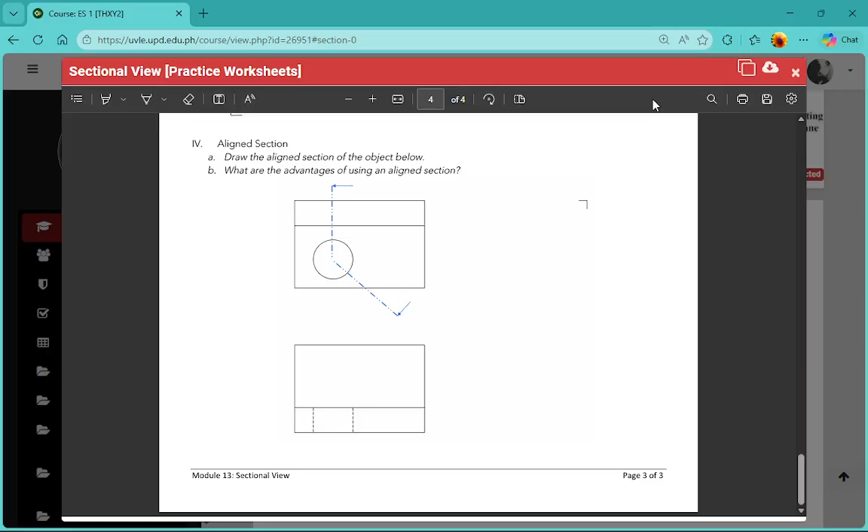Alright, so this is the last lesson for ES1. We'll be doing aligned sections and you can find the plate for today or the practice worksheet for today dito sa plate 17. Ito actually yung ginamit natin last week, no? It's page 4 yung gagamitin natin of the practice worksheet. I'll be adding one more kasi since we have 3 hours to do this and kaya naman natin in just siguro 30 minutes or 30 to 1 hour, no? So we'll do this simple one first, tapos dagdag tayo ng isang much more complicated na object. And we'll do those two. We'll probably end earlier today and the rest of the session gawin natin consultation session na lang for the object that you want to pursue dun sa final project nyo.

Okay? So, let's start. Again, download the file. Tapos, gawin natin. Double check ko lang. Nagre-record ba? Okay, record naman.

Tapos, again, hindi tayo mag-PDF import, no? Kasi pag PDF import, hindi kasi siya gawa through AutoCAD. So, hindi siya nag-appear properly. So, we'll do attach. Ito yung gagamitin natin. So, let's go to the insert tab. So, from home, insert. Then, you do attach. And find the file. I'll select this one, sectional view. And okay lang. Nag-lag konti yung device ko.

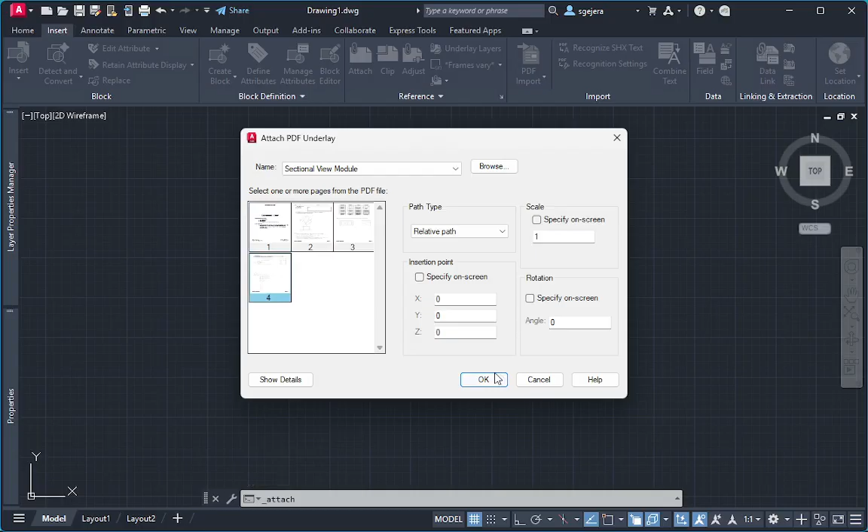Okay. Ang gagawin natin is I'll choose page 4 and I'll just specify 0, 0. Then zoom, extents. And from what we've learned before, need natin siyang i-scale up, no? So, probably the easiest way is to scale up the entire thing para sakto siya, yung units niya is yung exact dimensions of the A4 size. So, I'll just double check units through UN and naka-millimeter naman ako.

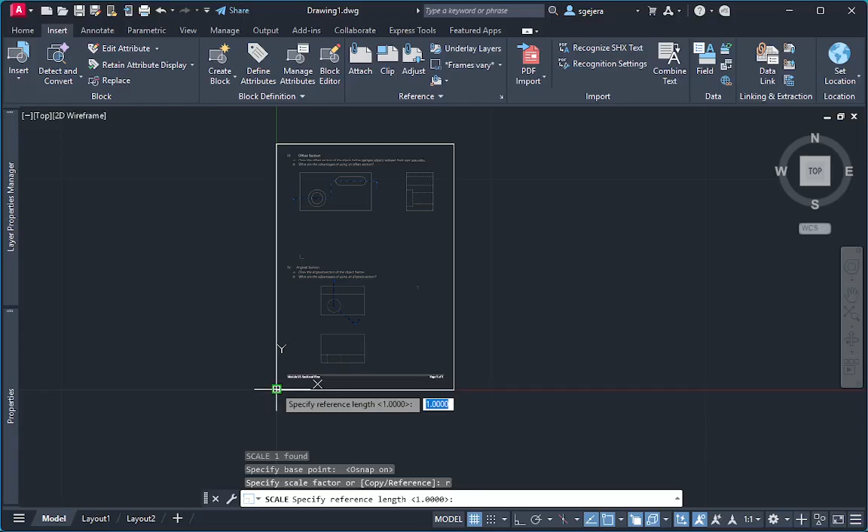So, since I'm doing millimeters, pwede kong gawin is I'll select this page. I'll do SC for scale. Then, select a base point which is the lower left. Ito, that's our base point. Then, instead of writing a scale factor, again, reference yung gagawin natin. So, we do R for reference. Select the bottom line, the reference line. Now, we can adjust this to the new dimension. Which is, kung A4 siya in millimeters, it's 210 by 297 yata. Basta ang alam ko ang width ng isang A4 is 210. So pwede kong i-adjust para maging 210 siya.

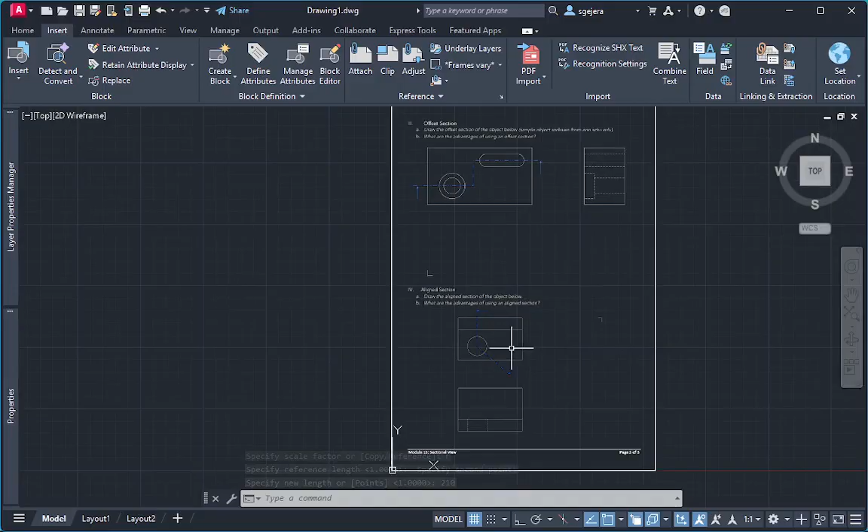So what happens is ito exact size na. So this is now scaled correctly, no? So if I just measure kunwari ito, let me just measure this one. It's around 35 which makes a lot of sense. Parang 35 millimeters ito. And just double checking ito, this should be 210. Tapos yung height niya should be 297. Tama, 297. So that's a quick way to scale up, no?

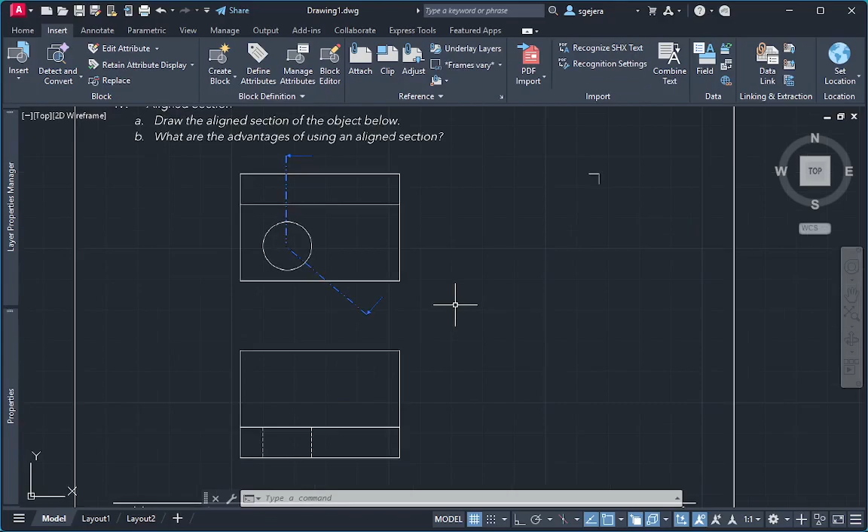But again, since infinitely scaling naman, kung hindi naman particularly interested tayo sa correct dimensions, pwede naman na hindi na natin i-scale up. Pero scaling it up just makes it easier para pag insert dimensions tayo or create tayo ng hidden lines, etc., hindi na natin kailangan i-mess around yung scale factor, kasi it's scaled correctly in the proper view, no? Okay?

So, eto, gagawin natin is an aligned section, and hindi masyadong kita sa projector, pero the aligned section is this one right here, and I'll just recreate the aligned section para mas makita nyo on screen. I'll just create a line from here to here. Yan. So, nag-create lang ako ng line on top of the blue line kasi naka-blue line siya dito. So, this is our aligned section.

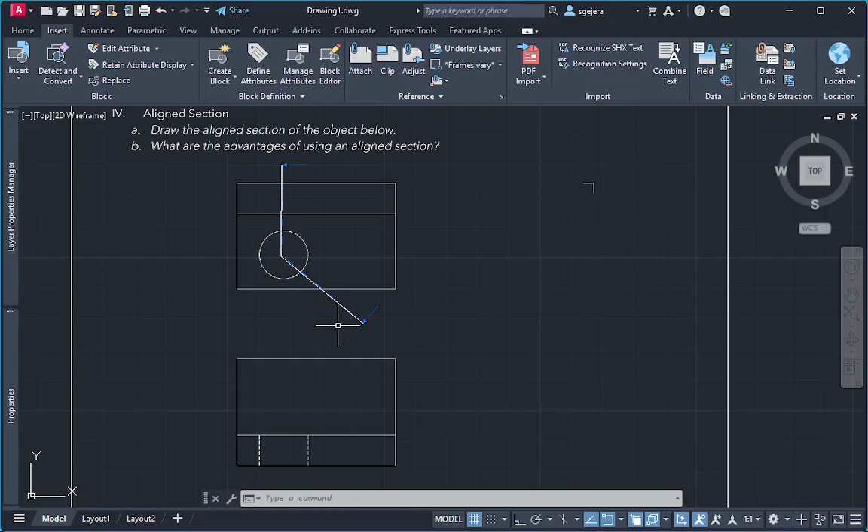So, the aligned section is, again, a sectional view wherein one of the sections is not parallel to the other portion. So for example, this is the first section. This is perpendicular to the fold line, pero itong section na to is not perpendicular to the fold line, no? It's at an angle. Okay? Now, again, from our lesson last week, kung meron tayong aligned section, hindi natin pwede siyang directly i-project lang along the normal. Like, for example, hindi pwedeng orthogonal lang siya or perpendicular siya dito sa folding line na to.

Okay? Wait lang, parang nawala yung keyboard. Sorry.

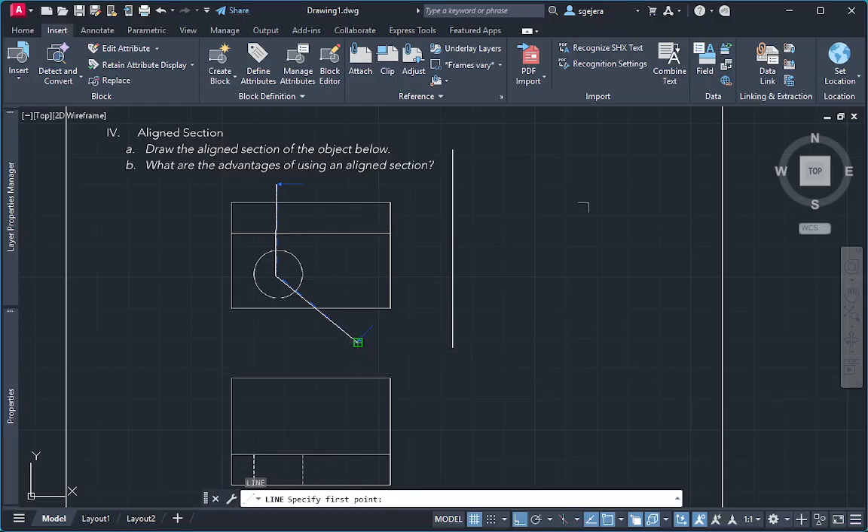Hindi pwedeng gumawa lang tayo ng line here and ganyan, tapos i-project lang natin lahat ng lines na to perpendicular to this fold line, because what happens is dito sa portion na to where there is yung aligned section natin, yung section kung saan nag-bend siya, hindi na siya kumbaga nagpapakita ng true dimensions, no? So it is shown in a shortened view na, kasi distances will be closer once projected into this portion right here.

So before we can do that, kailangan natin siyang i-rectify, no, such that gagawin natin is we will create a sort of rectified na length dito. Tapos after rectifying it, tsaka natin siya pwedeng i-project. And later on ipapakita ko sa inyo yun, no?

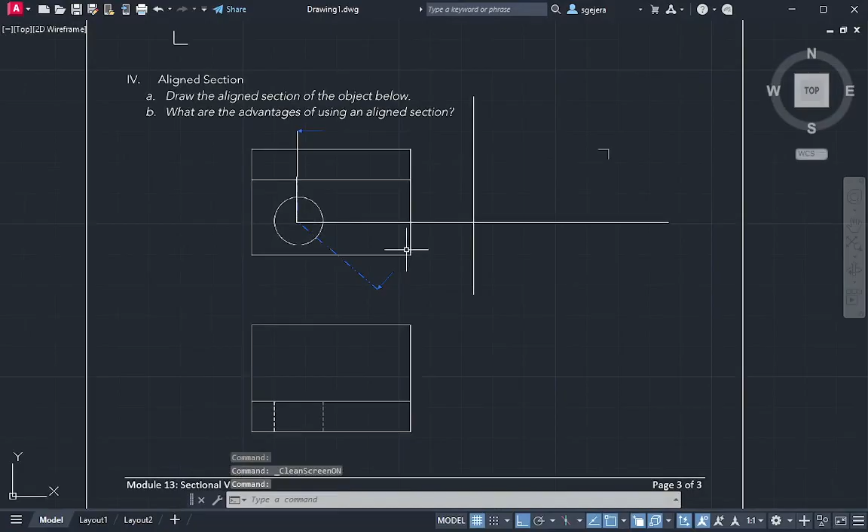So at the start, gawin lang muna natin, and I'll just delete this first, no? Gawin lang muna natin is let's try to create the portion wherein parang full section lang siya, no, or straight lang yung section natin. Then afterwards, i-create natin ito.

Okay? This object right here, pagka tinignan natin, it's a simple object, no? If you look at it from the top view, parang may dalawang rectangles tayong nakikita. Isang rectangle sa taas, itong rectangle na to, tapos isang rectangle sa baba. Okay? Tapos dito naman, baliktad yung rectangles, no? Yung large rectangle is nasa taas, tapos ito namang bottom or yung smaller rectangle is nandito sa bottom, no?

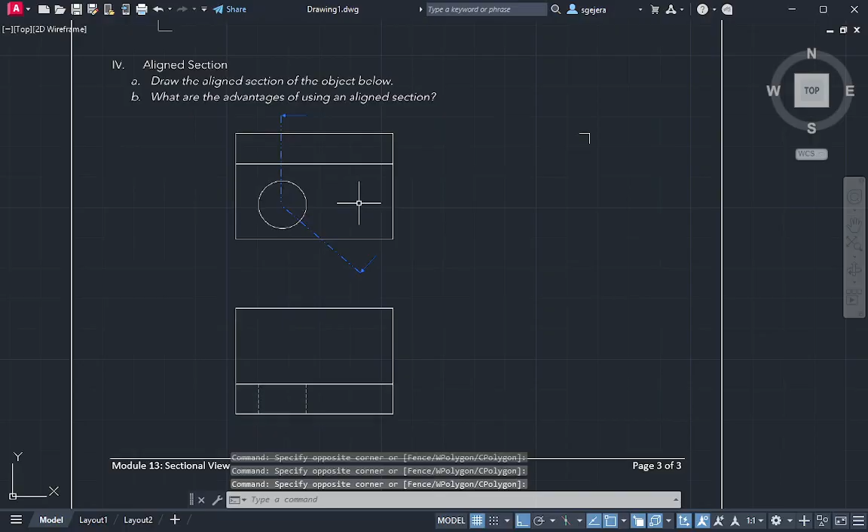Which means that this shape is probably para siyang L shape, no? Tama, para siyang may vertical wall na nakatayo, tapos meron kang platform na nakahiga sa ground. Tama? So that's the most likely configuration. Tapos dito sa platform na nakahiga sa ground, yun yung may butas na circle, which is signified by this one, no? Itong hidden lines dito.

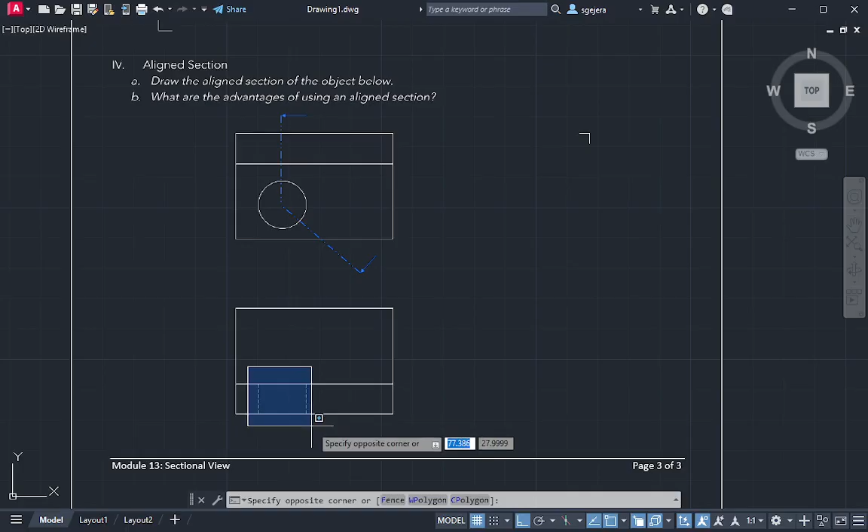Okay? So this can be easily done. Try lang muna natin, project lang muna natin from this point, and let me just change my layers now. I'll add a new layer. I'll just say answer. I'll make this yellow. So we project again, hindi nagwo-work yung snapping dito because this is a raster image, no? Let me just double click para select the correct layer.

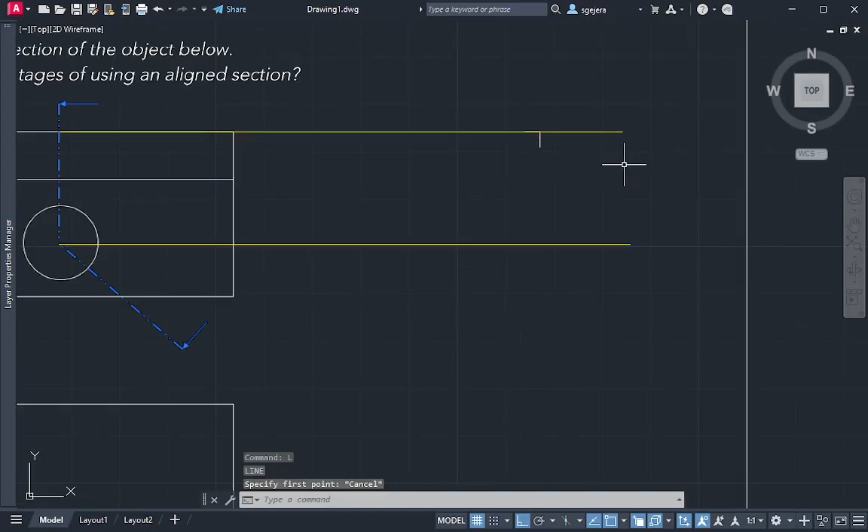And I'll just begin to create my projection lines. From here. Ito, I'm just estimating kung nasaan yung center, no? Although, given naman yung center, which is this one, hindi ko alam kung litaw siya sa projector. Pero you can zoom in para mas makita nyo. And let's just start from this portion, no? Ito lang muna. And we have itong starting point natin, no?

Or yung markers natin, so we can create something that looks like this, and I can probably just trim this para mas malinis. Okay, tapos gawin natin is copy lang natin muna yung height ng object para alam natin kung saan siya mag-end. So this is this height right here, copy lang natin, and let's just create a perpendicular line like so. Okay, so ito yung sort of glass box natin for the upper side ng aligned section natin.

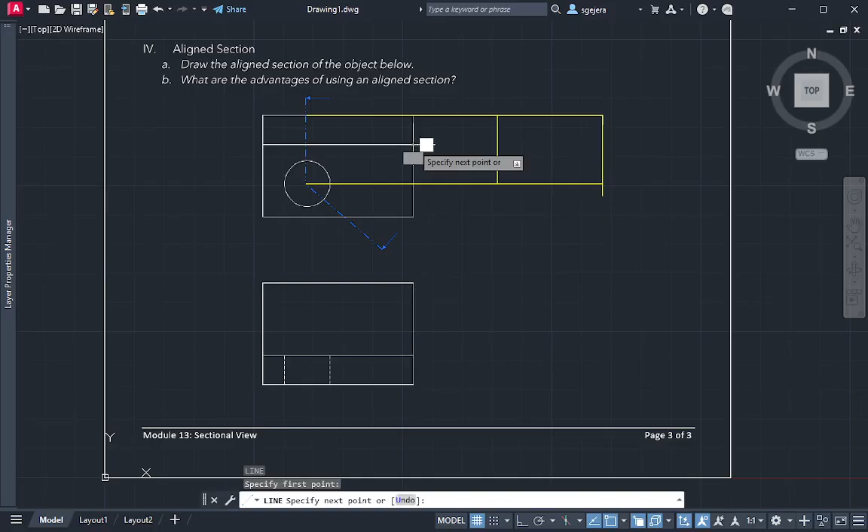Alright, so let's try to complete this. Gawin natin is let's do the wall first, no? Yung parang nakatayo na portion. So that portion is just signified by this one, no? Parang ito lang siya. If I created a perpendicular line from here to here, then this should be, kumbaga, the side view of that wall, no? Right? So it's as easy as that.

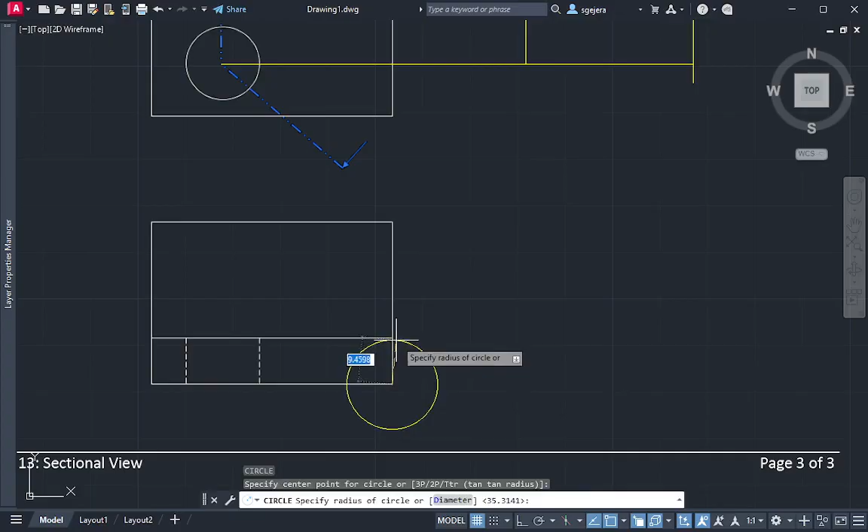Tapos dito naman sa baba, which is yung thickness ng platform natin na nakahiga sa ground, is just this one, no? So pwede natin kopyahin yung distance na to, lipat lang natin dito. And I can create something like this. Now, I'll just trim this down. Ito, pwede siguro i-trim ko na din to. And this one, ito yung L shape na nakikita natin.

So, it cuts across the section or the solid itself. So, pwede natin siyang ma-create itong L shape na to. And just by looking at it, we know na pwede natin i-trim tong sides na to because this is an entire solid, no? Ito, itong buong to. From the wall up to the platform, isang buong solid yan.

Okay? Now, from this portion, meron kasi siyang butas. So, we know na magkakaroon siya ng discontinuity dun sa hatch lines na i-create natin, no? Or yung solid portion. So, we can create a line projecting onto the sectional view. Tapos we can trim it down. Tapos itong line na to, this is where the solid section ends, no?

So ito yung solid. Tapos pagdating dito, this is now the back half of the, if you're looking at it from the right side view, ito yung back nung hole or ng cylinder dun sa likod. Tama? Which is shown as just a plane, no? Okay? So it's as easy as that. Madali lang natin na-create yung first na section, no? It's just an L shape na merong portion kung saan hindi siya naka-hatch. Okay? So, ang pwede natin gawin is we create our polyline.

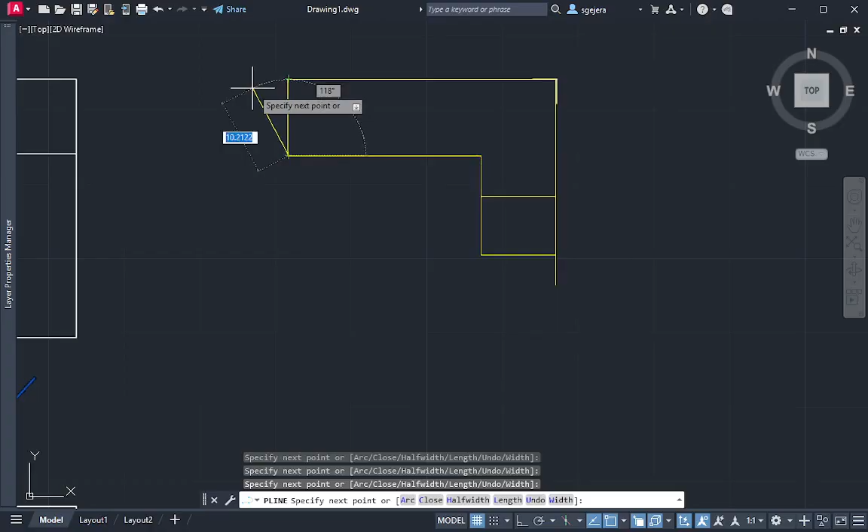Tapos create ko lang. And again, I'm using polylines because it's easy to hatch kapag naka-polyline sila, no? Instead of defining another region. Okay? So, this is our polyline. Ito siya. And let's use the hatch tool again. We press H for hatch. And lalabas itong menu na to.

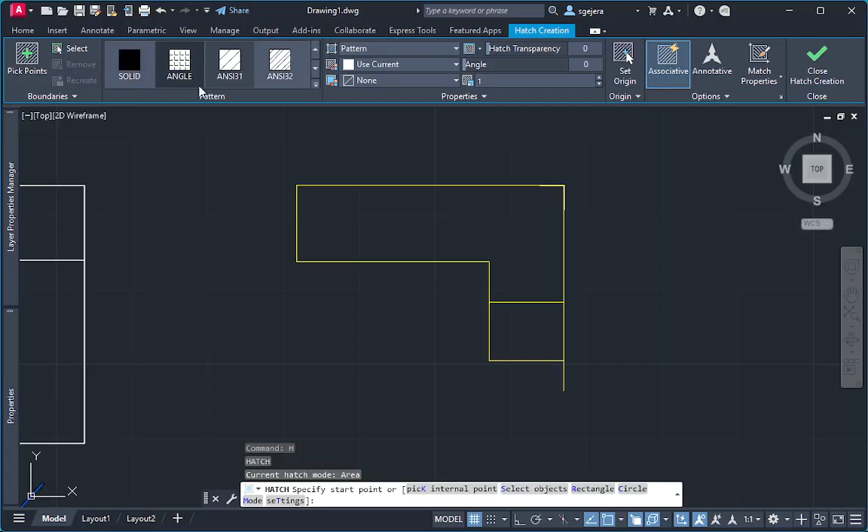And I just realized, kaya pala lumalabas siya sa akin na ganito because I'm in immersive mode, wherein hindi naka-ribbon siya. Pero sa case nyo is naka-on yung ribbon nyo. If you press H, actually lilitaw siya dito sa ribbon portion. So, probably na-notice nyo din naman yon. And the options are actually nandito sa top ribbon. Automatically lilitaw siya. Pwede kayong pumili ng ANSI, etc. But if you're like me and you like working in immersive mode, na naka-off yung ribbon, if you press H, ang lalabas is a dialog box.

Okay, so let's select ANSI 31. It's the general purpose na pattern. Tapos, we select our object, which is the polyline that we've just created. Press enter. Tapos, I think okay na yung default settings dito. If we press OK, it should hatch perfectly.

So, notice how dahil ang ginawa natin is we scaled the PDF up, hindi na natin kailangan na baguhin pa yung scaling ng hatch lines. Okay na siya. So, that's one advantage of scaling your PDFs first before even beginning your drafting. Okay? So ito, I think this is okay na. Nagawa na natin yung first half.

So, siguro stop muna ako dito. Check ko muna yung work ng nandito sa face-to-face. Right. So, if you're having trouble, pero yung iba magsisimula pa lang yata kasi may clock error ba? Raise your hand kung may clock error. Madali pa lang naman to, so don't worry, mabilis na lang makakot to.

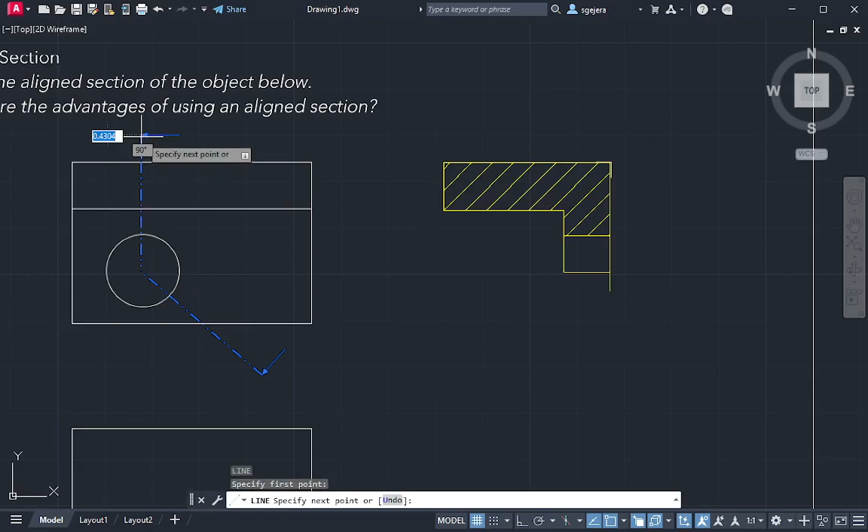Okay? So, itong portion na to is, again, madali lang siya. So, itong mahirap is actually the aligned portion. This one. Because ang goal natin is kailangan natin siya ma-rectify, and I'll just draw it again para mas malinaw. So, the problem is that kailangan natin i-rectify muna ito such that it's now sitting parallel to the first line na ginawa natin. So, dapat ganyan siya.

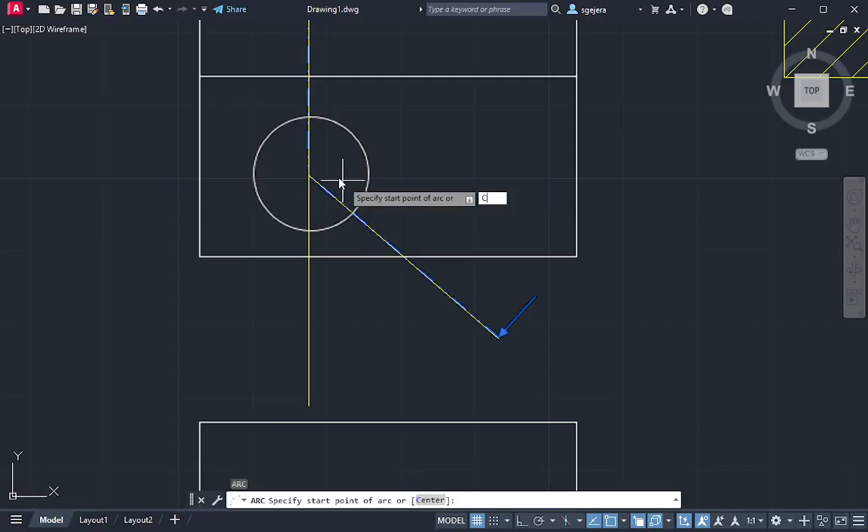So, what we need to do is measure all the dimensions na tinatamaan itong section na to, and create tayo ng arc such that papasok siya dito sa new section. So, create tayo ng arc, place the center here, tapos from this point, i-create natin yung arc papunta dito sa line na to. Ito portion na to, most likely dito siya mag-end, because this is a circle, so yung arc niya, if we were to rectify it, papunta lang din siya dito.

Tapos, ang next niya na feature would be this one. Tama? So, ang natatamaan ng mga features nitong aligned section natin is this is the first feature. Second feature would be this one. So, 2 features lang actually siya. So, we first do arc, the center from here. Tapos, create tayo ng ganyan. Kung saan siya tumama, yan yung location niya along the rectified na section.

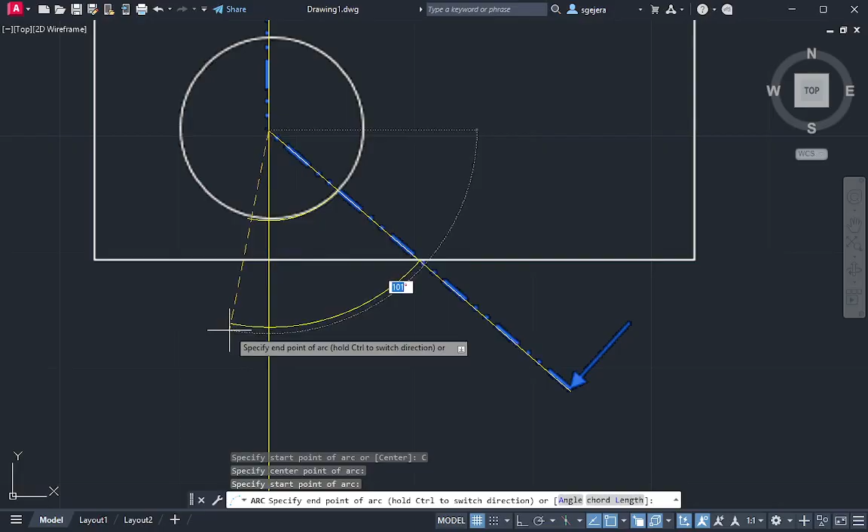So, if I create another arc from here, this portion right here, gusto ko siyang patama dito. Okay? So, this is now the new dimensions or the new distances na ipo-project natin onto this line. So, let's just extend this line like so. Tapos, extend lang natin siya from here to here. Kasi ito din naman, extend lang natin ng ganyan. So now, eto na yung continuation ng aligned section natin.

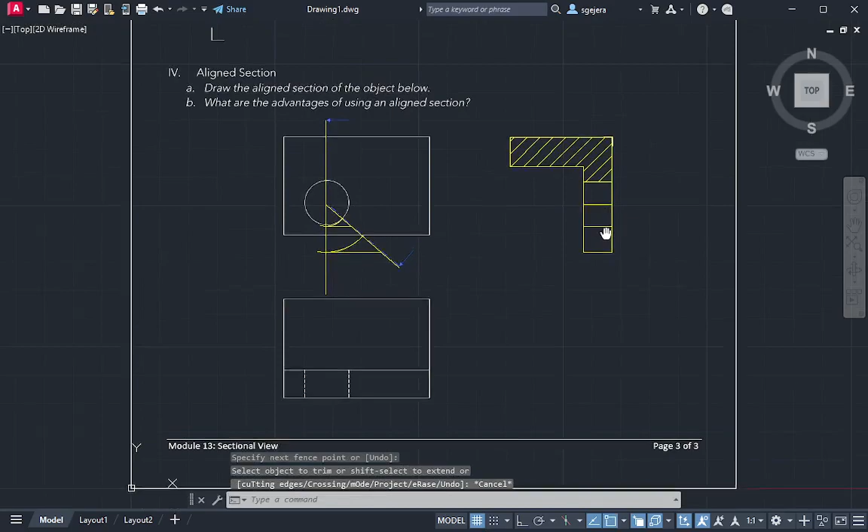So what we can do is extend this line like so. We can trim it, and we can trim this one as well. Alam ko na this portion right here is a solid na section. Naka-hatch siya kasi it corresponds to this one. Tama? So, this portion corresponds to itong intersection na to. Tapos, itong portion from here to here corresponds to the hole. So, ibig sabihin, from here to here.

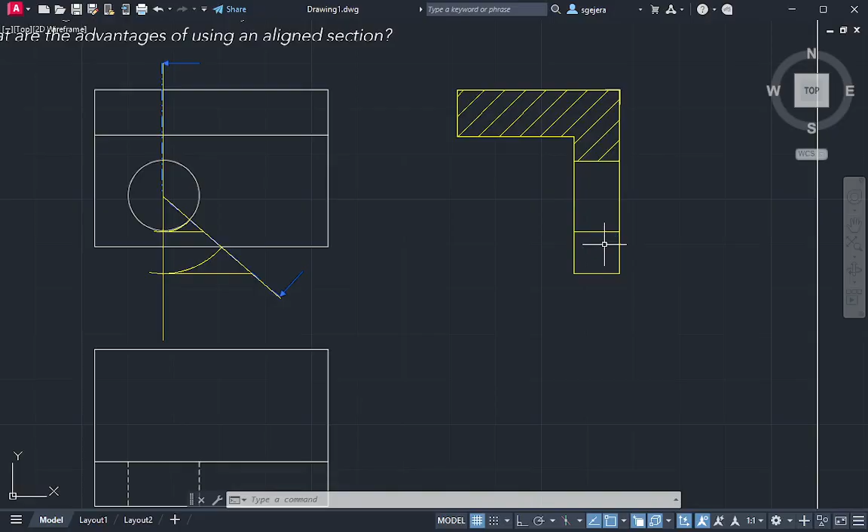So, which makes sense na itong line na to does not exist. Papalitan natin siya ng center line. So, this is the curved surface na litaw. Tapos ito naman is the section or the hatched na region. So I can just do a rectangle. Tapos click ko lang siya dito. And I can do hatch again.

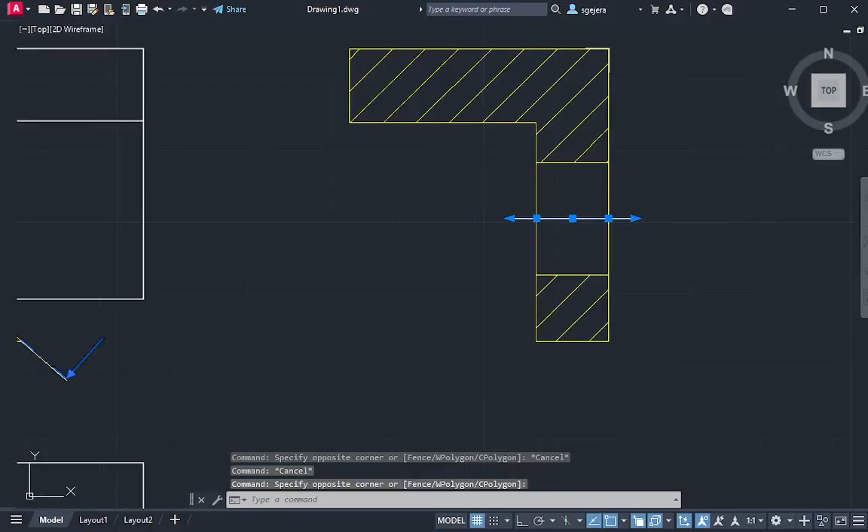Select my object, which is this one. Then press OK, and I should have hatched it. Ang kulang na lang dito would be the center line, no? So I can do center line command. I'll select this line and I'll select this opposite line, and it should create a center line, no? Pero masyado ito maliit, so I'll change the scale a bit kasi hindi siya litaw, no? Let's say 0.5 kung lilitaw, and 0.5 works, no? So that's our center line.

So ganito yung itsura, no? So what you'll notice is that yung part na kung saan siya naka-align would appear as if parang larger siya than the actual extent of the glass box, no? Kasi the glass box extends only up to here. Dapat pag ganyan lang siya. Tama? So dapat hanggang dyan lang siya, pero our dimensions extended up to here. So it's because dito sa portion na to, ang ginawa kasi natin is nirectify natin siya from this section, parang binend natin siya or straighten natin siya such that aligned na sila lahat into one sort of rectified na section, no? So that's why ganito na yung itsura ng object natin.

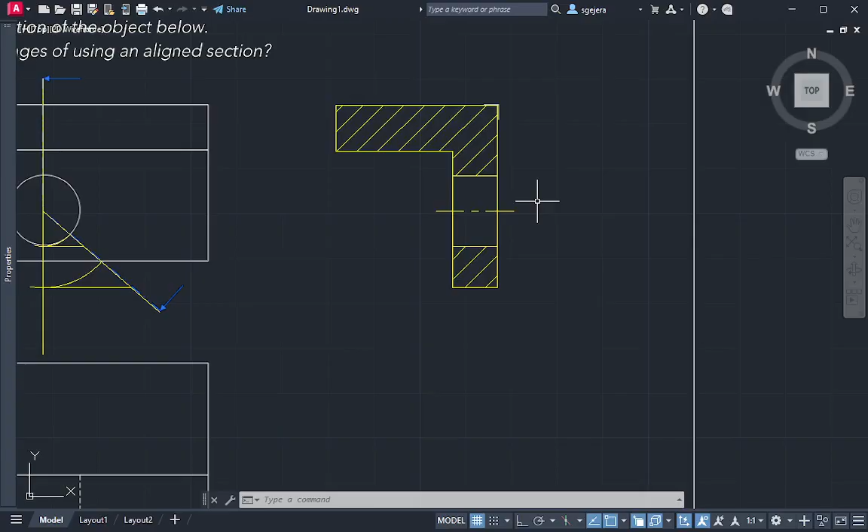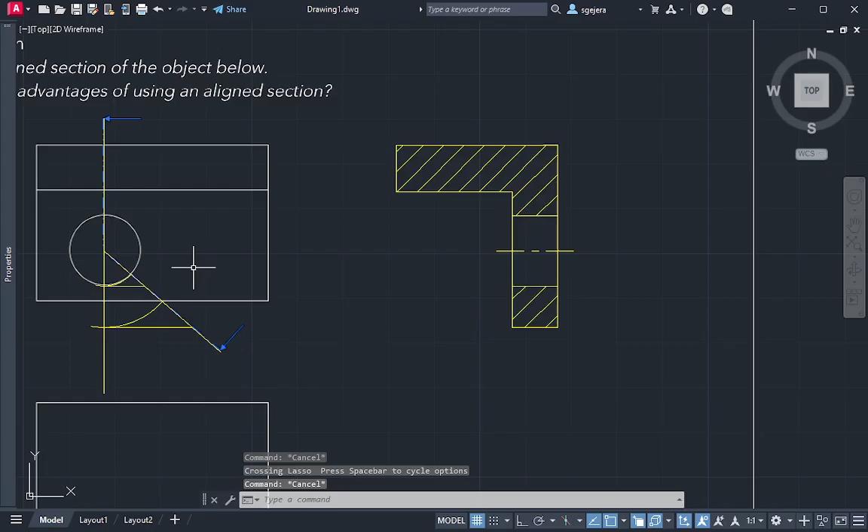Okay? So again, this object is quite easy, no? Try natin gawin siya in 3D later on, pero I'll allow you to complete the work first before we proceed to the 3D version. So again, eto, na-imagine naman natin siya, no? Para siyang L-shape lang, tapos may butas siya, and because of the align section. Although, it must be noted na this is not, kumbaga, the optimum use of an align section, no? Because an align section is supposed to reveal features that can only be revealed kapag aligned siya. Pagka ganito, this is strictly as an exercise lang, no?

Kasi if you look at it, yung align section na pinili is this one, tapos nag-bend yung section papunta dito. Pero walang purpose tong bend na to, no? Kasi wala naman siyang additional feature na kumbaga tinamaan or gustong i-expose. And the primary goal naman ng align section is that there is another feature that is not covered fully by just one full section, no? So, again, this is not the way we use align sections. This is just an exercise para makita nyo kung paano ginagawa ang isang align section.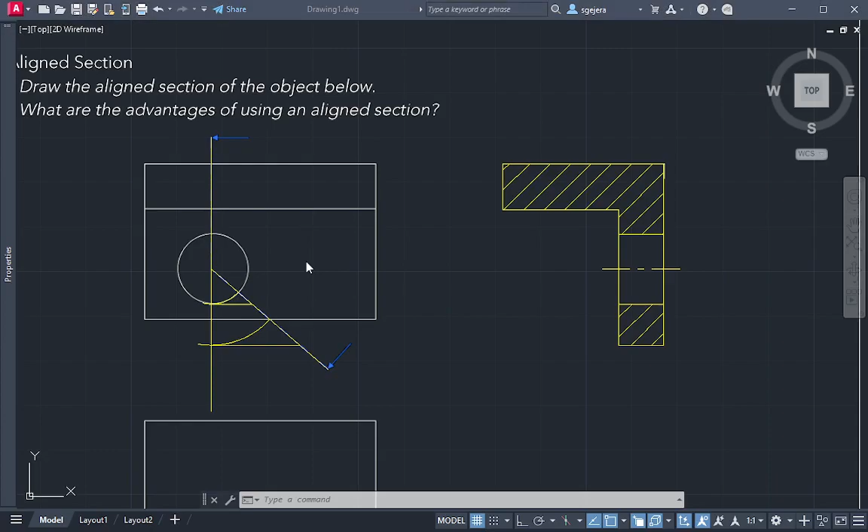I'll show you dun sa slides natin, eto. There's a good example of when aligned sections should be used, no? So, let me look at this one. This is a good use of aligned sections kasi if you look at it, if you just did a full section from this portion papunta sa ilalim, hindi nyo makikita itong feature na to off to the right side. So, in this case, it is more appropriate na instead of just one full section, ang gagawin natin is that we want to use an aligned section.

Okay? So, ang best case dito should be this one. This is the aligned section. Such that makikita natin yung internal feature na to as well as this internal feature right here. So, if you look at the final answer, this one, kita natin yung both internal features. Which is, again, the primary purpose kung bakit tayo nagse-section view in the first place, no? Because we want to see the internal features of the object. Kaya hindi ko na ma-delete. Close ko na lang. Okay?

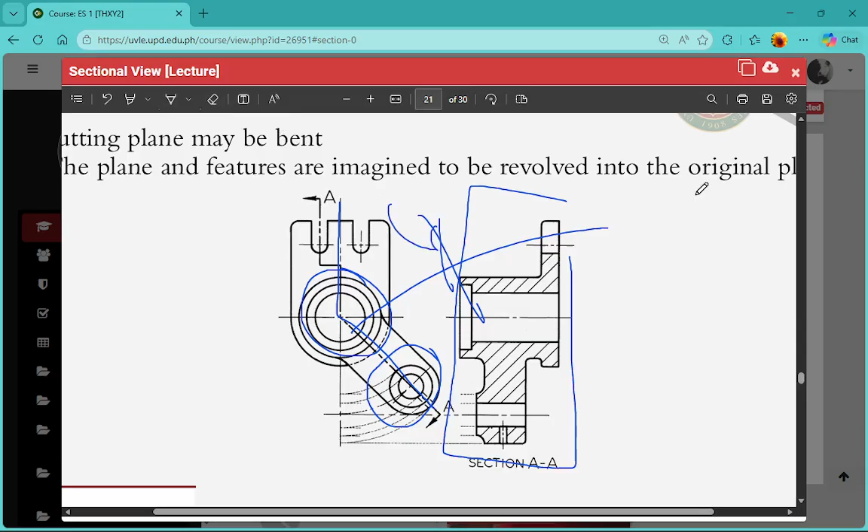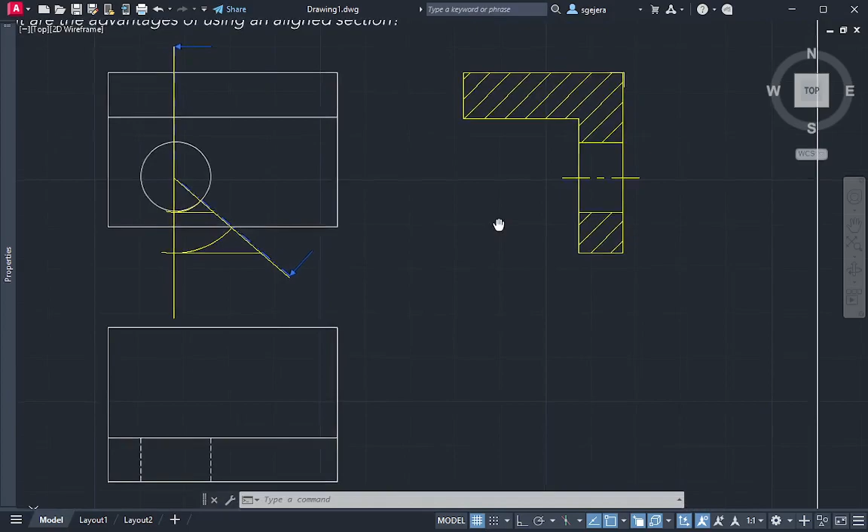So, we'll do another object. Okay na tayo? Pwede tayo mag-move on from this object or gusto nyo pang tapusin? Sige, tapusin nyo muna. Ito yung final answer niya. Okay. Ay, sorry. Gagawa pala tayo ng 3D pa nito, no? The 3D version is, again, easier siya, pero there is a bug in the 3D version wherein only half of the aligned section shows up hatched. So kailangan natin mag-create ng corrections, no? Using the layout tab.

Okay, habol muna iba. If you're having trouble, just raise your hands, tapos lalapit na lang kami. Ang expected final answer should be this one.

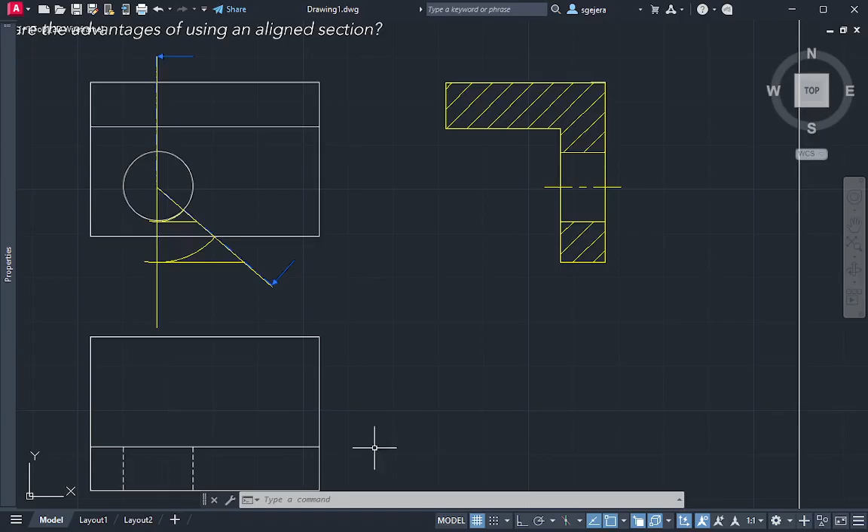Okay? So, most of you nakahabol naman na, and for those na hindi pa naka-fully habol dahil sa mga technical difficulties, you can always just review this recording, tapos check nyo na lang yung mga techniques na you may have missed, no? So, try natin ngayon. Let's do the 3D version, and to do the 3D version, we first have to create the 3D model, no?

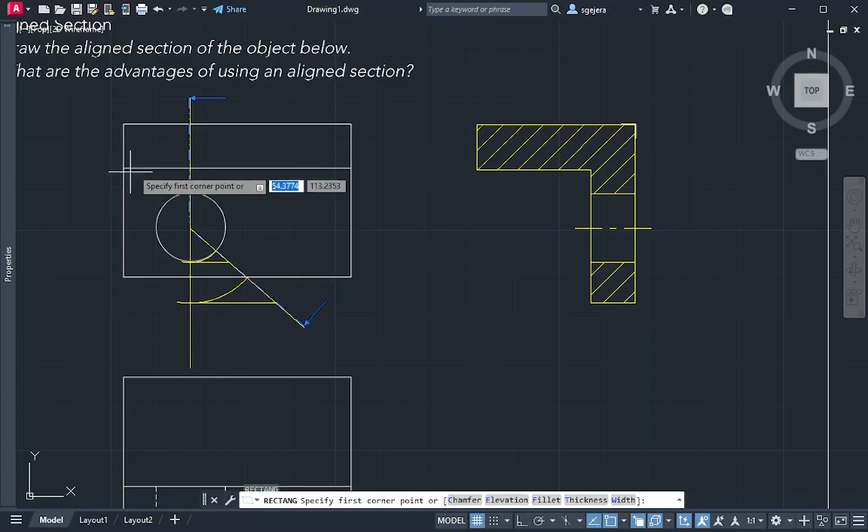Okay? So, again, this shape is fairly simple. Parang isang box lang siya, no? Tapos, isang L shape lang siya with a wall and a platform. Tapos, dun sa platform, meron lang siyang butas, no? So, I think the easiest way is to just copy the profile nitong top view, no? Kasi yung sa top view, yun lang yung i-press pull natin. Okay? So, let's do a rectangle like so. Ito. Copy ko lang siya.

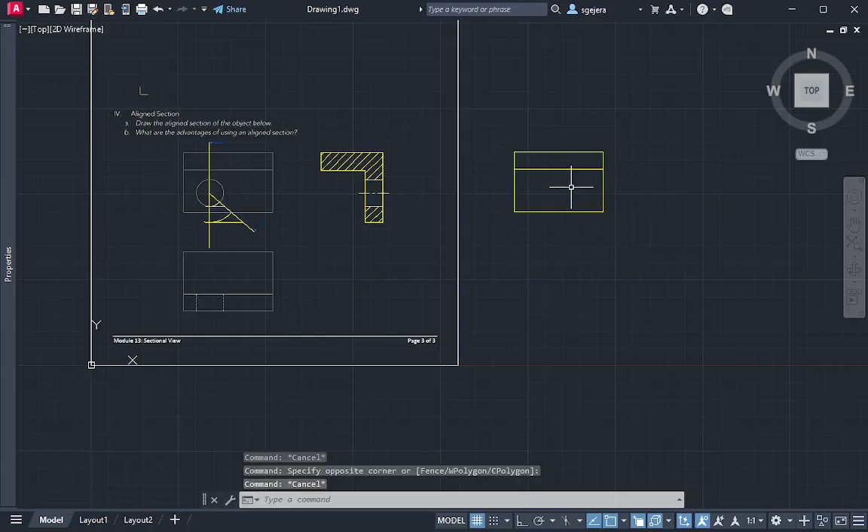Ang ganyan. Tapos, copy ko din yung profile nitong parang wall natin. Okay? Now, if I move this off to the side, lagay ko lang sa right side, parang ganyan. We now have a starting base wherein pwede natin i-press pull. I-press pull natin tong large area by this height. Tapos yung smaller area, i-press pull natin by the height of the wall, which is this one. So I think that's the easiest way to do it.

Okay? So pwede natin gawin is, when I'm doing press pull, I like to orbit around para kitang-kita ko kung paano siya nag-press pull. And I'll change this to hidden para hindi siya magkaroon ng mga optical illusions. But before that, I need to get the distances. Memorize lang yung distances. This is 9.9, so let's just say 10.

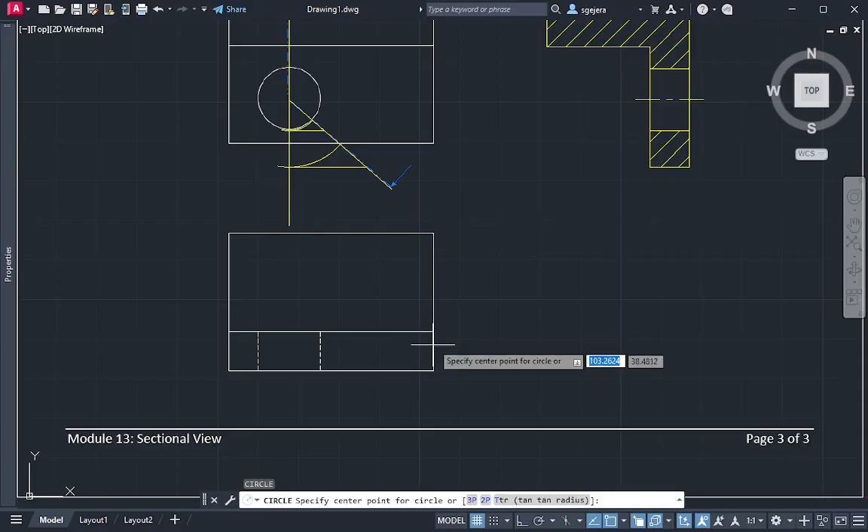Tapos, ito namang larger height. It's 34.6, 35 siguro. Okay? So, 10 for the base, tapos 35 for the wall. For the base, we just do press pull, tapos hover over the area. Itong larger area na to, make sure na tama yung area na hina-highlight ni AutoCAD. So, I'm hovering over this bounded area and ipa-press pull ko lang siya by 10.

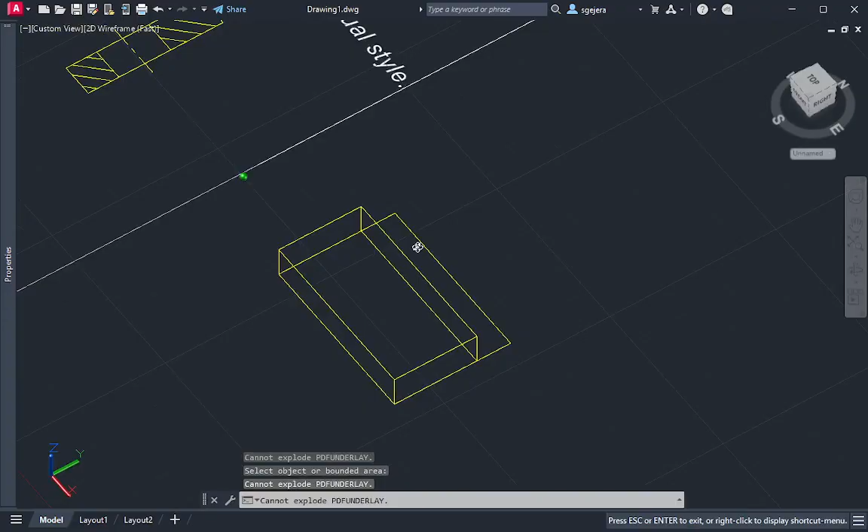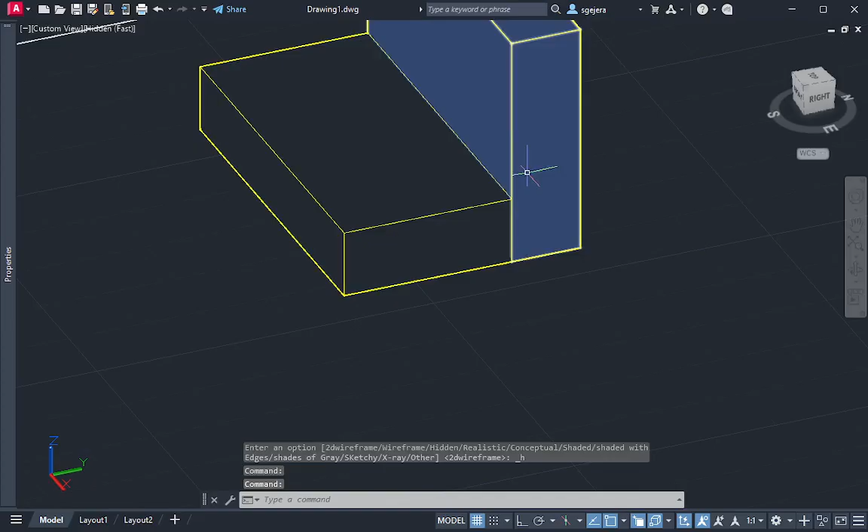And the other area, presspull din natin by 35 naman. Okay? So, ganyan siya. Tapos, if you look at it from itong hidden portion, may line pa dito, which means na may correction pa tayo, kasi two separate objects siya. This should be one object. So, let's do union. Select the two objects, press enter, and nawala yung line, which means na isang solid object na siya. Kulang na lang is the hole that's located here. So, hanapin natin yung hole na yon.

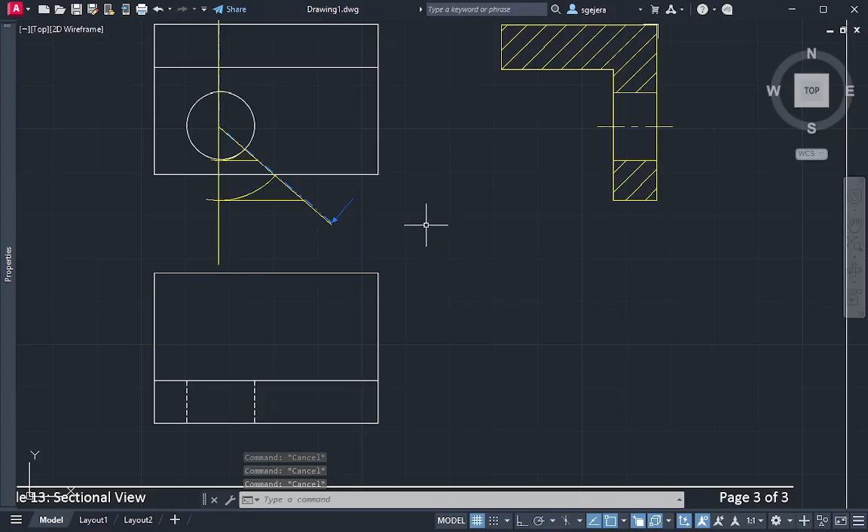The bad thing about working with raster images is that hindi siya lumilitaw unless binalik mo sa 2D wireframe yung visual style. So, that's another issue with using raster images. Ang gawin natin is hanapin lang natin yung circle na to, and it's as easy as just overlaying. I can just overlay a circle as best I can. Tapos, para alam ko kung saan yung distance niya from this corner, I can just do REC.

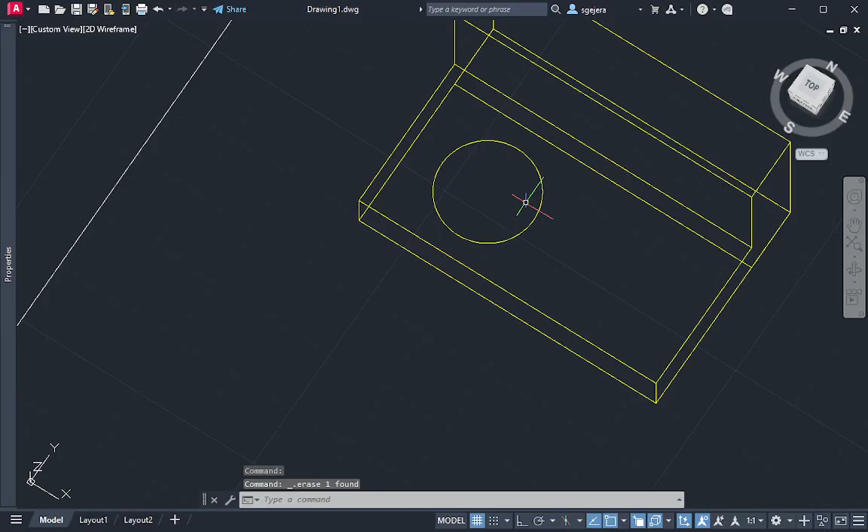Then, selecting the corner. The good thing about this technique is that I can select both, tapos i-move ko lang sila using the base point at this lower corner, para pag nilipat ko dito sa 3D object ko, pwede ko siya idikit mismo sa corner na to and it will be perfectly aligned. And I have successfully transferred the circle exactly where I want it to be. The last step would just be to presspull, butasin natin siya pababa para ma-create tong hole. And if I go to hidden, this is exactly what I want.

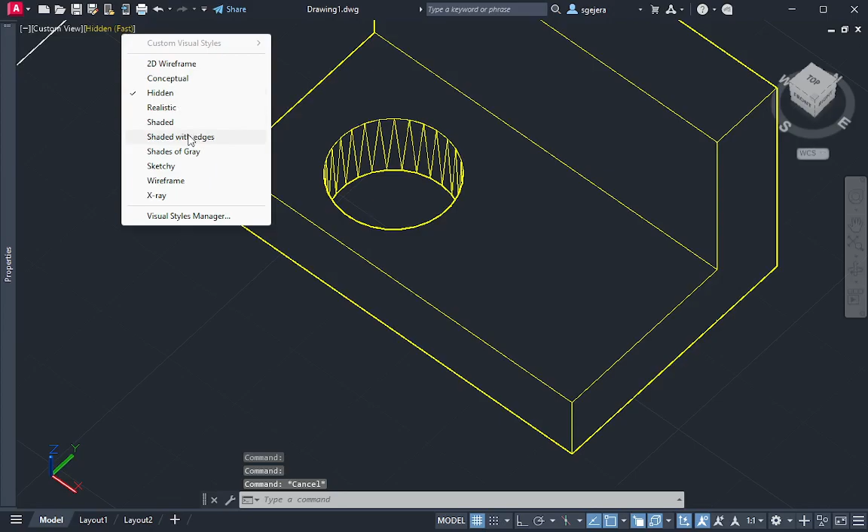Parang ganyan siya. Let's do shades of gray. So that's my object. Parang may platform ka sa baba, may wall ka dito to the side, and may hole ka. So this more looks like a bracket. Parang siyang L bracket na merong hole for probably a screw or something. Okay? Right?

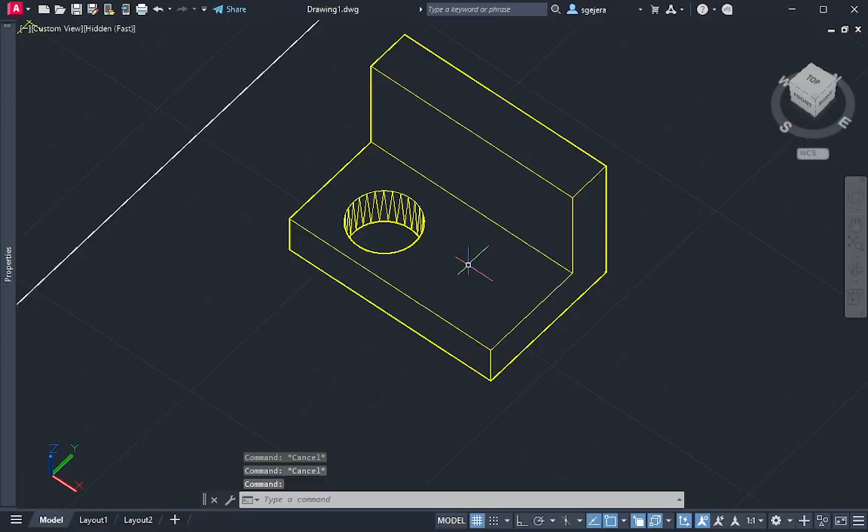Sige, habol mo na yung iba. I'll change to hidden ulit para mas madaling makita. Okay, again, if you're having trouble, just raise your hand, tapos lalapitan namin kayo ni Jody.

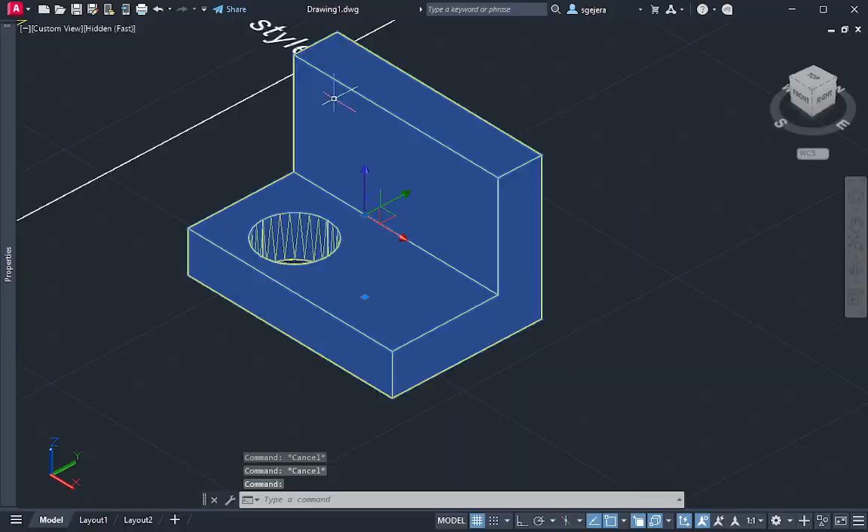Again, if you're having trouble selecting objects, especially kung overlapping na sila lahat, you can always just hide first some of the objects that you don't want to work with muna. Click the object, right-click, isolate, tapos either hide the object or isolate the object. That's one way to do it.

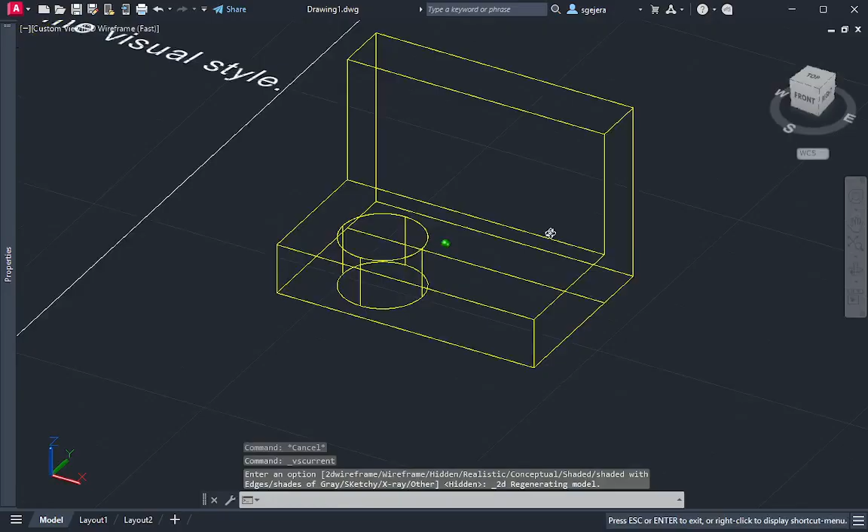Most students just like to use wireframe, no? Kasi pag naka wireframe mode, nasa-select nila yung individual lines without any problem. So I get the merit, no, of using wireframe. Actually, parang nagme-make sense din, no? Kasi hindi nyo na kailangan umikot dun sa baba para ma-select.

The problem with wireframe naman is that kung complicated yung object, masyadong madaming overlapping lines. Baka mas nakakalito naman siya. Okay? Some students, ako, if I want to mix both advantages, I use X-ray, no? Kasi X-ray gives you an idea of how the 3D object looks in space. At the same time, kita din yung mga lines from behind. So X-ray is also good.

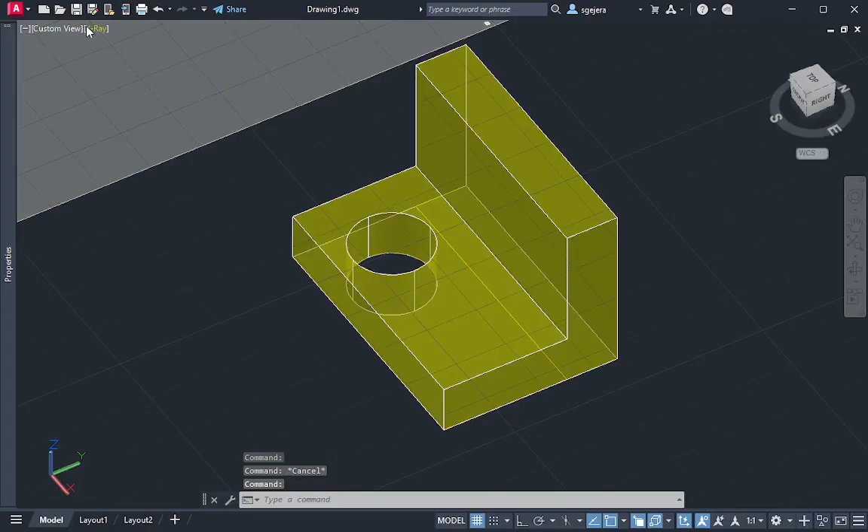For the most part, maganda tong hidden. Okay? So I think okay naman yata na. So let's go into the layout tab. So again, punta lang tayo dito sa layout tab. And in the layout tab, I'll first show you the powerful way, which is using the view base command, which is this one. Pero again, for those without view base and for those users na naka-Mac, tuturuan ko din kayo ng manual method para gawin yung section.

Using the old method, deprecated na nga siya ngayon, which is the draw, kalimutan ko na yung command. Well, babalikan naman natin siya. So let's start with the more convenient one, view base. Let's just select view base right here. Select natin from model space, and again, it will take a few. The first time you do this when dealing with a new file, matagal talaga siya, so okay lang na parang feeling nyo naglalag siya. But if you have a more powerful PC, almost instant siya lalabas. Sa akin, hindi ganun ka-powerful yung device ko, so it takes a bit of time before it loads.

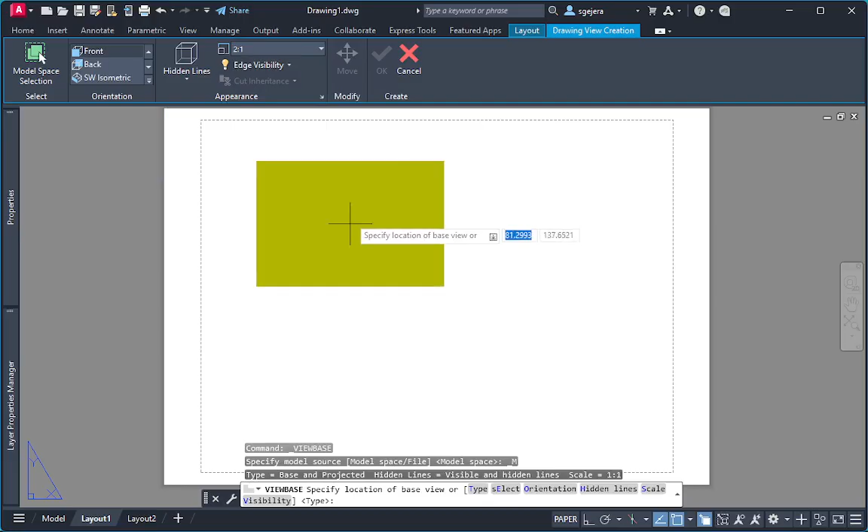So let's do front as the parent or the base. And masyado maliit yung 1:1. I could probably get away with, try lang natin 2:1. Okay lang ba 2:1? Parang okay lang 2:1. So I'll select this one, press enter. Then select from the top, press enter.

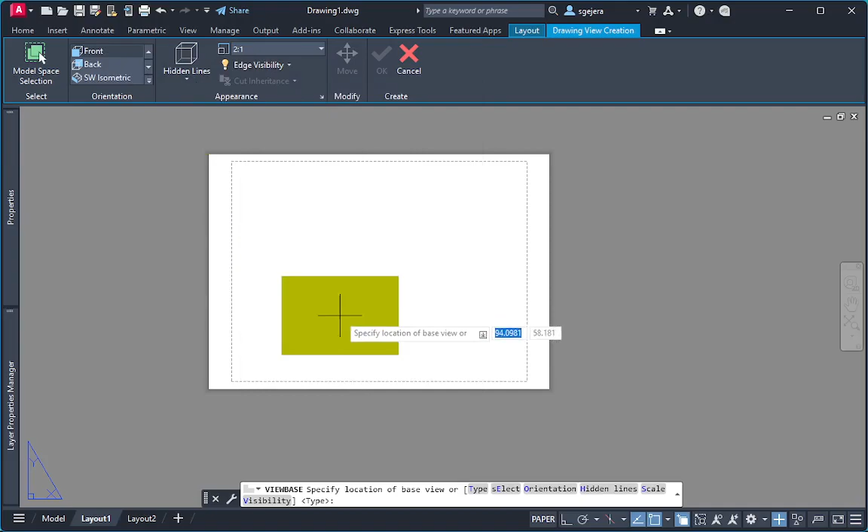Sorry. Mali to. If you look at it, mali siya because hindi ko binago. Ito, parati kong nakakalimutan tong part na to. Change to third angle first. So styles and standards, third angle projection. Let's just delete this and do view base again. And notice, kung second time niyo siya ginawa, mabilis na siya. So I'll do 2:1, front view again. Press enter, then click sa taas to give you the top view. No need to create the isometric, hindi naman siya kailangan ngayon. So just press enter. And we have this one.

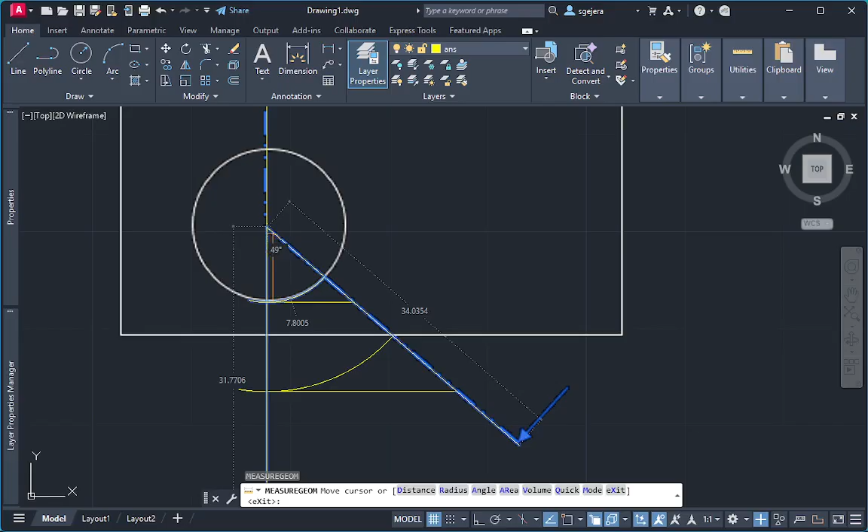Tapos ang gagawin natin is we'll do an aligned section. And we'll have to copy this one, kasi we don't know the angle. O pwede namang copy natin yung angle mismo. So let me just quickly go back sa given. Kailangan kasi natin i-measure kung ano tong angle na to. Measure. It's around 49 degrees. So from the center, magpo-49 degrees tayo papunta dyan. So balik tayo sa layout tab. Section, aligned section, which is this one. Then select the parent. Our parent would be the top view, kasi we're creating it from the top view. Tapos ang starting point natin would be from this center.

Again, there's two ways to do this. Pwede nyo i-create siya purely using the sectional tools. You rely heavily on tracking lines. So alam ko magsa-start siya dito pero it's aligned with this center. So I'll track it like so, then papunta dun sa center. Then dito, I'll select an angle. And this is measured from the vertical? Is it measured from the vertical? 0 siya dito. So measured from the horizontal pala, pero counterclockwise.

So kung dito, anong sabi ko? 59 kanina? 49 nga ata. So kung 49 siya from the vertical, it's 180 minus 49. That's 131. So pwedeng gawin natin is negative 131, para from 0 dito, negative 131 tayo dito. So we can do negative 131.

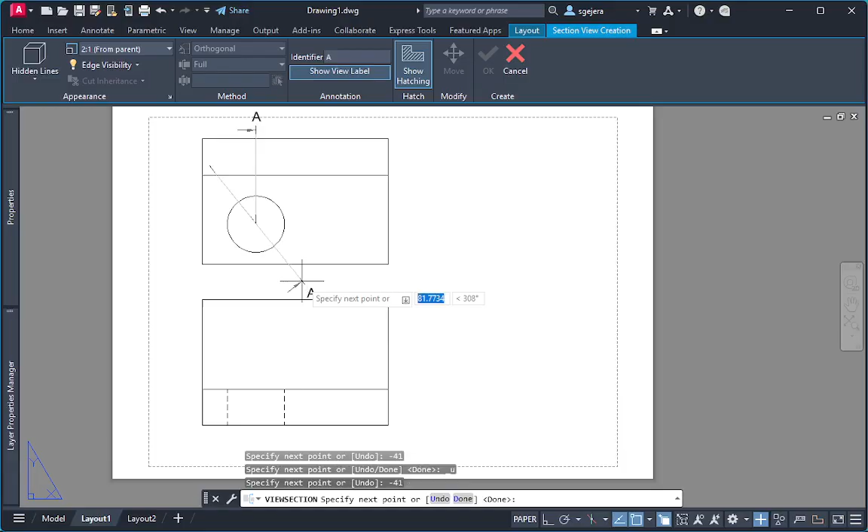Negative 41. Okay na ang negative 41. So, now that okay na yung align section natin, ang gagawin natin is i-create lang natin siya diretso to the right and press enter. And again, ito yung bug na sinasabi ko wherein only half of the section is hatched. So we'll have to do another hatching dito sa kabilang half.

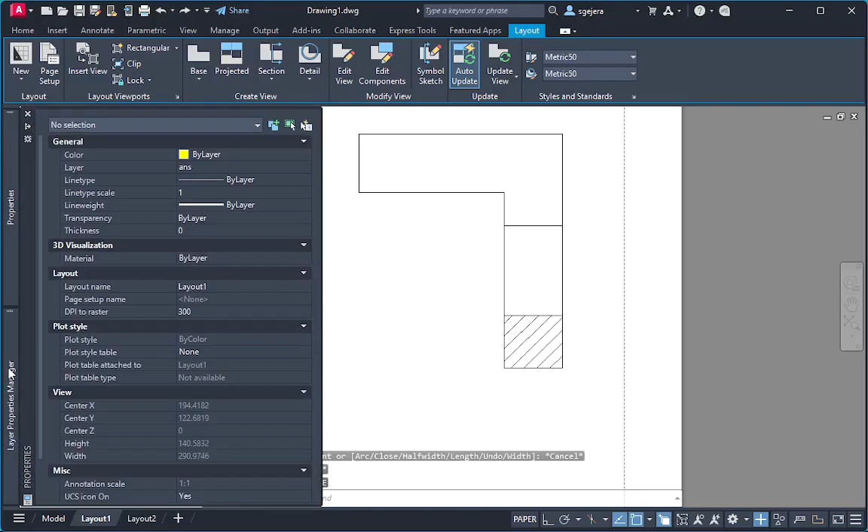So we can easily just correct this by creating a polyline. And probably I'll use the layer hatch para magmamatch yung property. So I'll do another polyline here. Tapos I'll do hatch. Then select the polyline na ginawa ko. Wait, sorry. Hatch. Then select, saan ba dito siya? Select the polyline na kakagawa ko lang. Press enter. And na-correct na natin.

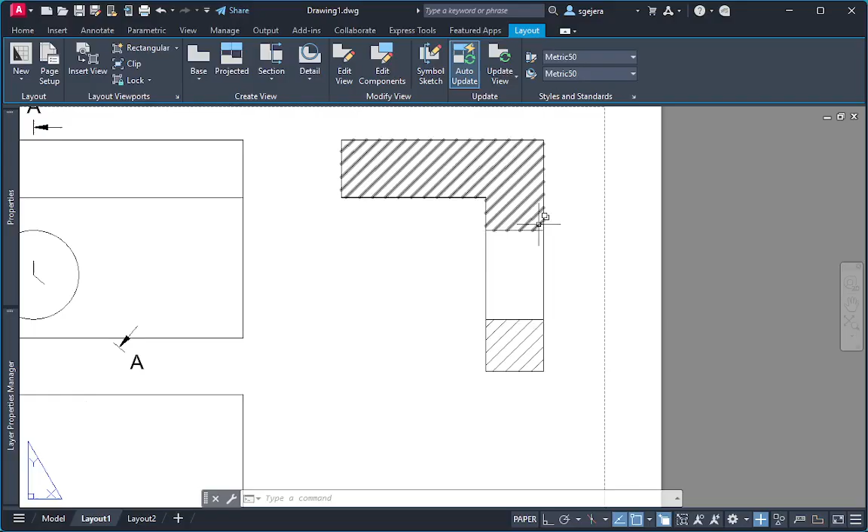So again, yun yung bug na sinasabi ko. There's a forum about this. And actually, nag-post ako sa forum. Tapos nag-post din si Sir Jeff Hoyt sa forum na yun. Since 2020 pa yata yung issue. Always, pag meron tayong align section, only half gets hatched. So, we'll just have to manually correct it.

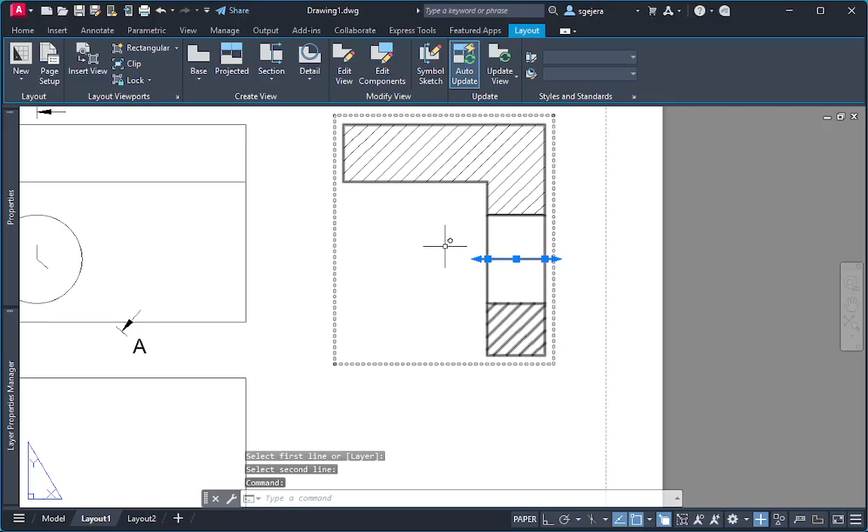So, ito na yung final answer. And ang kulang dito is center line lang. Let's create a center line from this line to this one. And we'll have to change the properties. 0.5 yung ginawa natin para lumitaw. So, that's our final answer. It's the same final answer na nakuha natin using the manual technique or 2D technique.

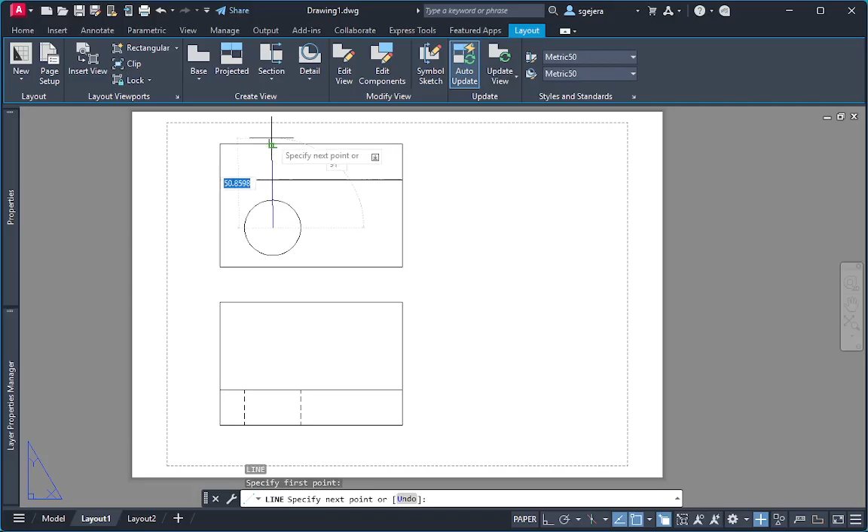So, another option, I'll just delete this para ma-explore yung other option. This is, I think, easier because kita nyo na from the start kung nasaan yung align section nyo. So, before you even begin doing the hatchings or the sectional view, you just create a bunch of lines that will show you the align section. So, gagawin lang natin, negative 41. 41 na pala siya.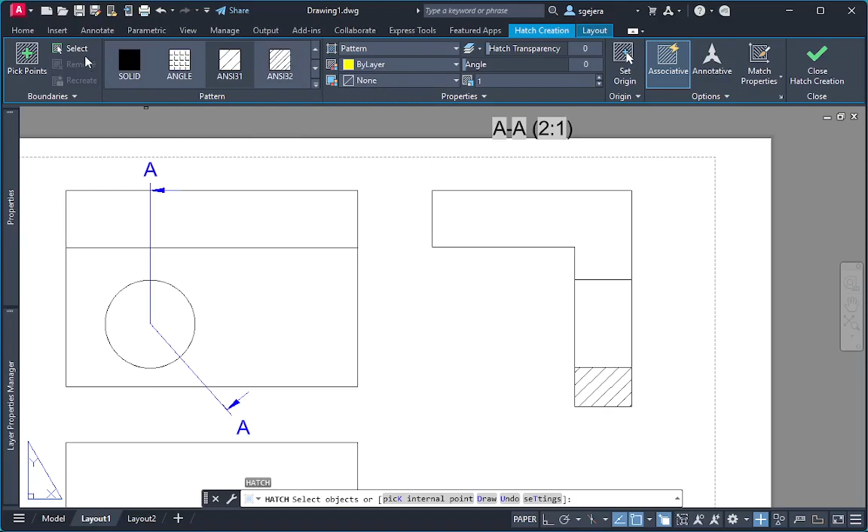Now, because I have these guidelines, pagka ginawa ko yung section na to, pwedeng direct ko na siyang i-click doon sa guidelines na kinreate ko. So, that's another way of doing it. And it's arguably faster because you don't have to worry about tracking. Wait lang, I'll just hatch this. Okay.

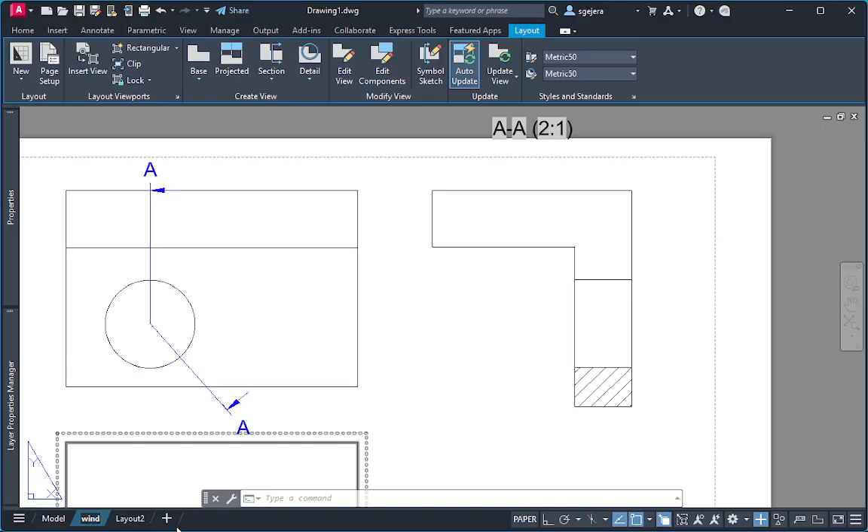So, for Windows users, I'll just label ito, Windows. Tapos I'll show dito for Mac users para alam nyo kung paano gawin. So again, ang gagawin lang natin is create tayo ng a bunch of views. Tapos from there, we'll be using yung command, wait lang, let me remember the command. Kahit ako nakalimutan ko. Draw? No.

View, not view base. Ba't ko nakalimutan? Ginamit ko to last time. Solview. Tama, the SOLVIEW command. So, let's do SOLVIEW. Tapos, let's just do UCS muna, and let's do world. Tapos, one, correct na ata tong scale na to. Tapos specify the view center. Let's just select somewhere here.

Mali. So let's move it around, like so. So ito yung top view natin. Pwede na to, so let's press enter. Then select the viewport para matrim down natin yung view, which is this one. And let's name this view as top.

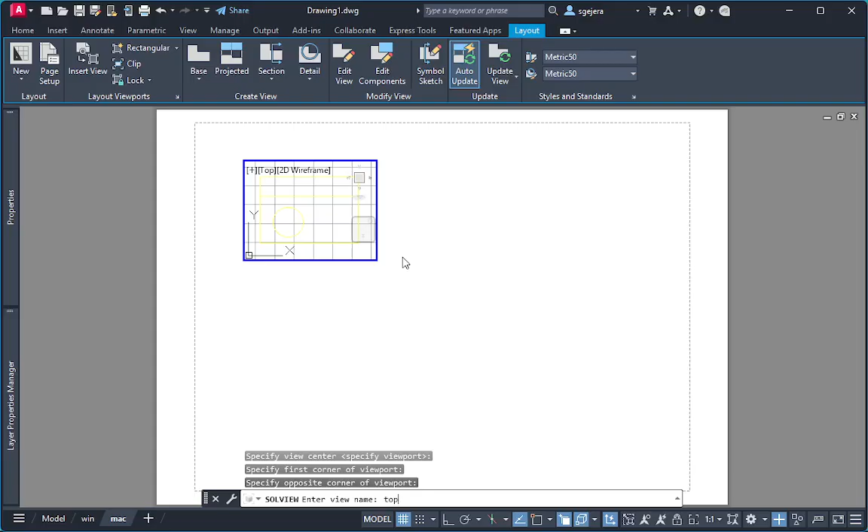Tapos next is let's do ortho para maka-create tayo ng front view. So let's just create this side from here. And it's a good distance naman siya. So press enter again. Let's specify the viewport, which is this one, para lang matrim natin. Press enter again. Tapos let's name this as front.

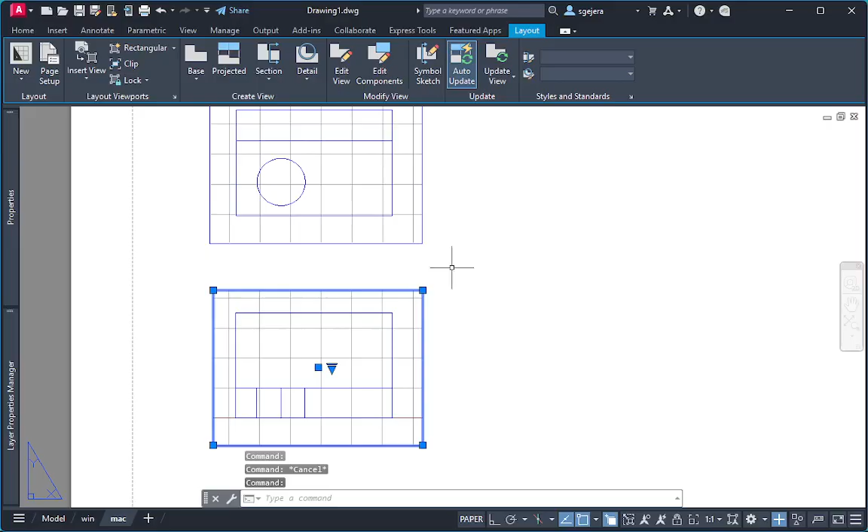And I'll exit out muna para makorek ko lang, kasi hindi siya masyadong litaw. Temporarily babaguhin ko siya to blue para mas kita. And later on, ma-delete naman natin to. For now, let's turn the grid lines off first. Double click into the view. Turn off the grid lines para mas malinis siya tingnan. Again, we'll solve this later, itong portion na kita yung boundaries ng viewport.

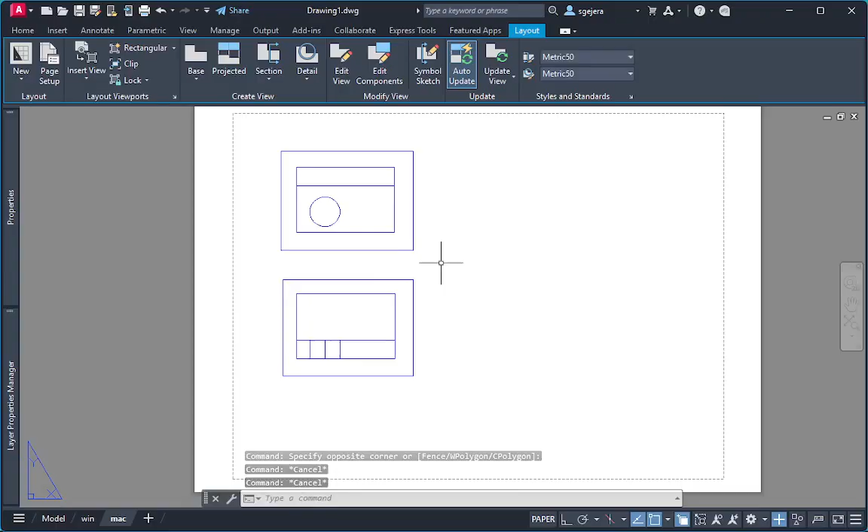Tapos ang gagawin natin is as early as now, create na tayo ng lines na gagamitin natin para sa sectional view natin, kasi we'll be needing it later on. So I'll just create it dito. And again, 41. So we have this line right here. Siguro i-trim natin konti to.

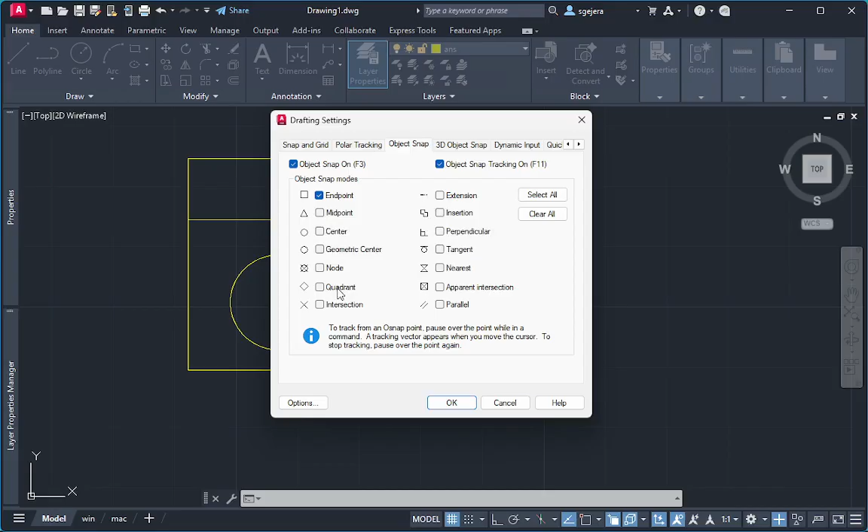So, I think what we need to do is create the line here first. Create lang tayo ng line, which is, turn this on. Let's turn endpoint. Endpoint and intersection. Baka enough na yun for this one. So let's do line. Ay, kulang pa pala. Kailangan natin ng center and quadrant. Mas madali na. So pwede ang gawin ko is I'll create the line first. Tapos ito 41.

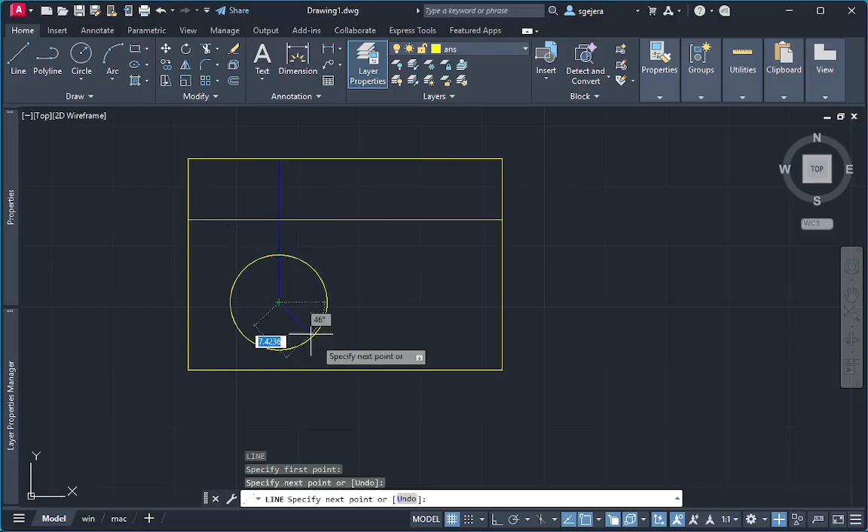Okay. So, pag bumalik ako doon, dito, and let me change again this one to blue, no? Okay. So, this is now part of the auxiliary natin para mas mabilis natin mahanap siya. So, let's do SOLVIEW again. Tapos, let's do section. Select the cutting point and again, enable lang natin yung endpoint pati intersection, I believe. Okay lang pala, kahit endpoint lang.

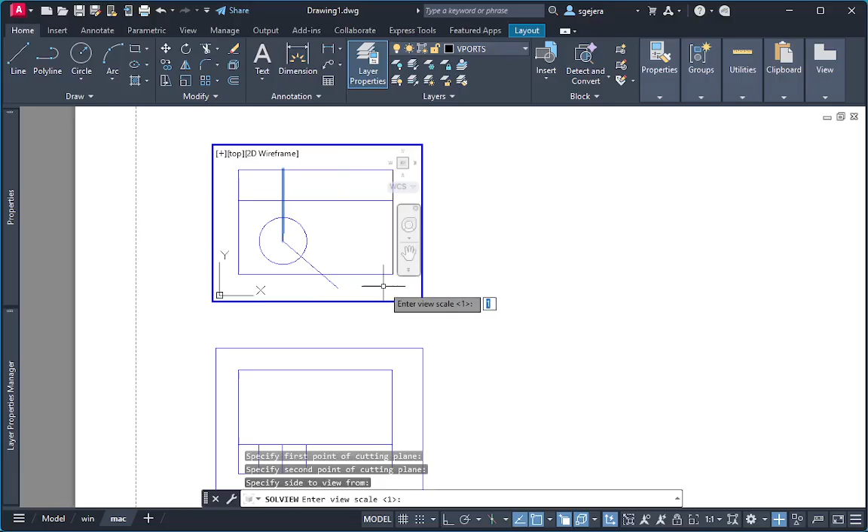Let's select this one, and let's select this one. View scale is 1. Okay lang. And let's select it. Papunta dyan. And okay naman to na distance, no? Press enter. Then first corner of the viewport again. Again, medyo matrabaho lang siya when we're doing this. And let's say this is sectional view, SEC na lang. Parang ganyan. And we can just escape out. Ito.